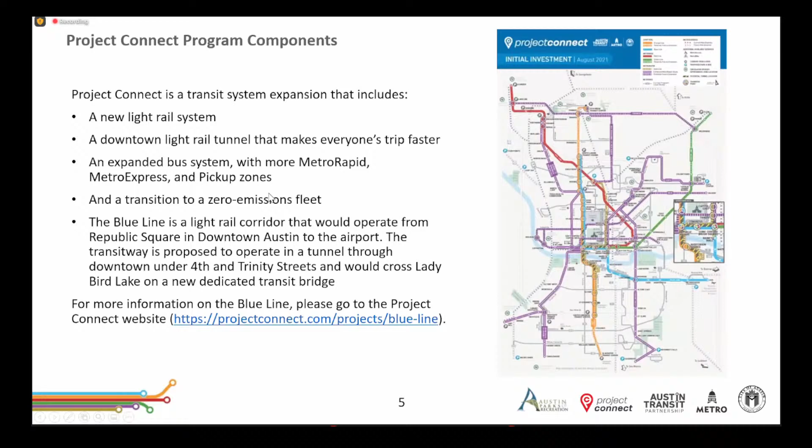Getting a little more granular, this is the blue line, one of the two light rail lines being proposed. The other is the orange line, which runs north-south. The blue line runs basically from the airport down the East Riverside corridor through East Austin, Southeast Austin, and then into the South Central waterfront area.

At the waterfront station, in the South Central waterfront area, it takes a right turn. This whole section of the blue line is at grade, running on the surface. There's a little bit at the airport that's elevated, but most of it runs on the ground in the center of Riverside Drive.

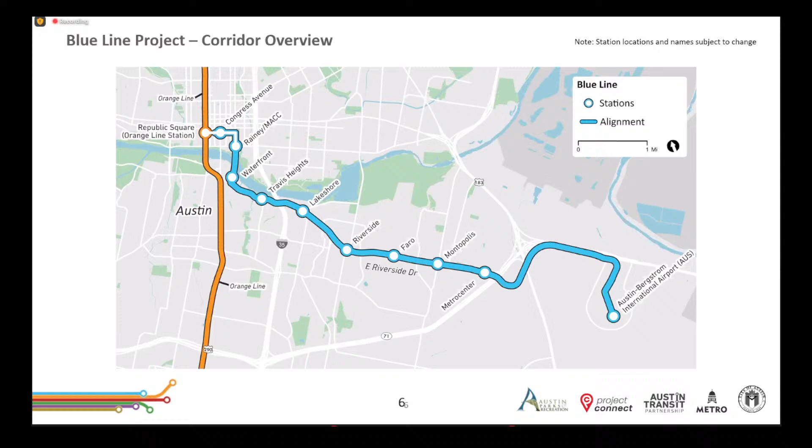When it gets to the South Central waterfront, it takes a right turn. There's one stop, and then it goes into a bridge over the lake. When it gets to the other side, it goes down into the tunnel. Then it joins at Republic Square with the orange line, and together the blue and orange essentially run north up Guadalupe and then eventually North Lamar. That's the context of the blue line, of which tonight's discussion is really a part.

This is a little more zoomed in, and you can see how the blue line, coming from the east down Riverside, takes a right turn at the South Central waterfront. There's an at-grade station, a surface station called Waterfront Station for now. All station names are subject to change as we move this process forward.

As it approaches the water, it rises up and over the lake. When it gets to the north side of the lake, there's what we call a portal, where the train dives down into the underground system. Basically north of the portal, it's all underground as part of the subway.

There is the Rainey Street station basically at Cesar Chavez, with a couple of entrances planned south of Cesar Chavez to provide easy access to the rail network. Then it continues north up Trinity Street, past the Convention Center, and at 4th Street takes a left turn and goes towards Republic Square.

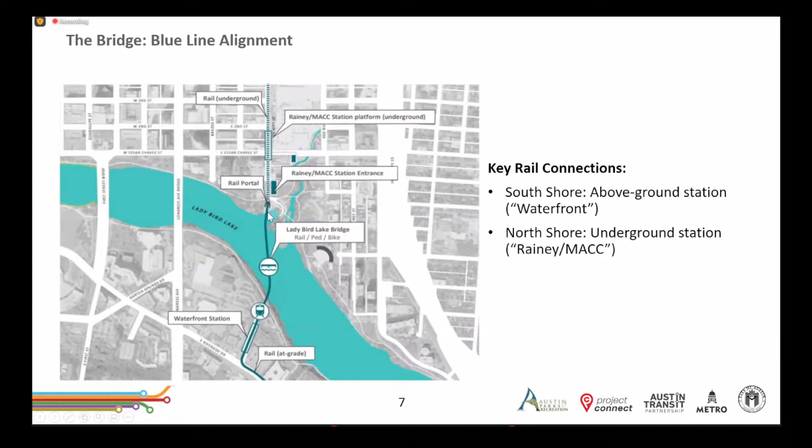This rail portal is a really key node in the whole alignment of the blue line. That portal is located almost exactly at the location of the Waller Creek Boathouse. That is really the basis for this conversation tonight, because there is a conflict there between this critical moment where the train goes into the underground system and the boathouse itself.

There are a lot of other elements in the vicinity as well that we are trying to weave through and make sure we're supporting and maintaining. In addition to the boathouse, there's the trailhead, the beginning of the Waterloo Greenway Trail, which runs along Waller Creek to the north, right at that same location.

There's also the outlet to the Waller Creek Flood Control Tunnel, which has a lot of critical ongoing operational requirements. That infrastructure basically removes the eastern side of downtown out of the floodplain, and there are operational requirements on an ongoing basis with that.

There's also the Butler Trail, the hike and bike trail on both sides of the lake, which is such an important and well-loved part of our community. So this is a very complicated area where a lot of different infrastructure elements of our city are coming together, of which the Waller Creek Boathouse is one.

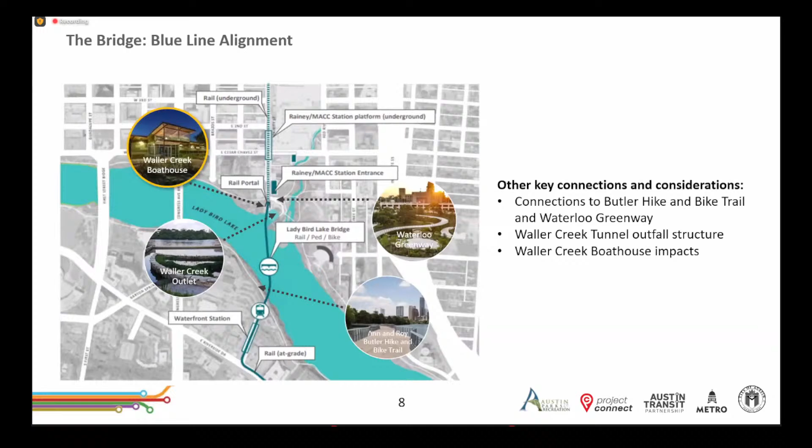In terms of where we are in the design and planning process, we are currently going through preliminary engineering and environmental review for the blue and orange lines. Last summer we released the 15% design, and we are now preparing the 30% design as well as the draft environmental impact statement.

As part of the preliminary engineering process, we have to document and identify all environmental impacts of the program, including physical impacts, historic resources, and environmental impacts, among others. So we're preparing that draft environmental impact statement, and the impact on the boathouse is one of the impacts we are analyzing and documenting as part of this process.

So the reason I point this out is that this discussion tonight is not going to be the last discussion we have. This is part of a process that will extend through the rest of the year in terms of analyzing impacts, documenting those impacts, et cetera. Then the idea is that we get through the environmental process by the end of the year.

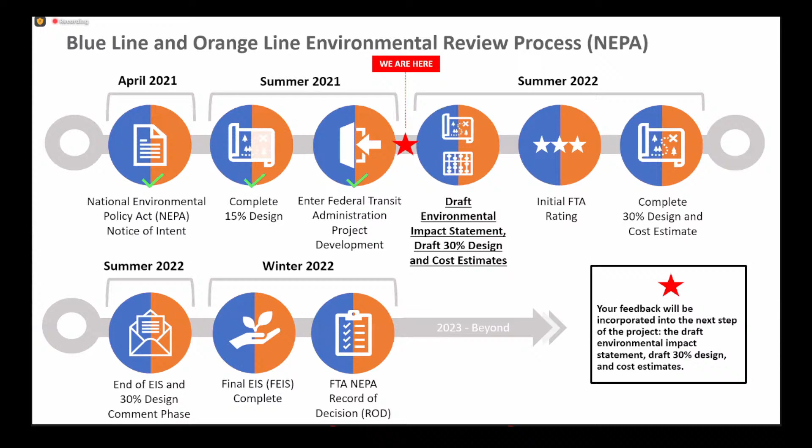So how does that relate specifically to impacts on the boathouse? This is a more specific flow chart to show how we're proceeding. The first thing we have to do is identify the impacts in association with the blue line. We've identified clearly that there is a potential impact with the boathouse just because of the intersection of the blue line with the current boathouse location. Those impacts are identified and analyzed in conjunction with our partners at PARD as well as at Texas Parks and Wildlife Department. Now, there's the boathouse itself, there's the surrounding and underlying park land itself, and there are issues related to both of those elements that we have to understand, analyze, and document.

So as we move forward, we will continue to assess what the impacts are, as well as what the mitigation will be to address those impacts. We can't just have the impacts and do nothing. We have to mitigate them. That's an ongoing process that we're working on now, and tonight's discussion is part of that. We're going to impact the boathouse. We have to mitigate those impacts.

As part of that mitigation for the boathouse, PARD has started to analyze potential alternative locations, alternative sites for boathouse facilities, if indeed it turns out that the boathouse will be impacted by this process. So tonight's event is really about gathering feedback and input from you all towards that analysis of alternative sites. It's a really important part of the process, and it'll all be documented.

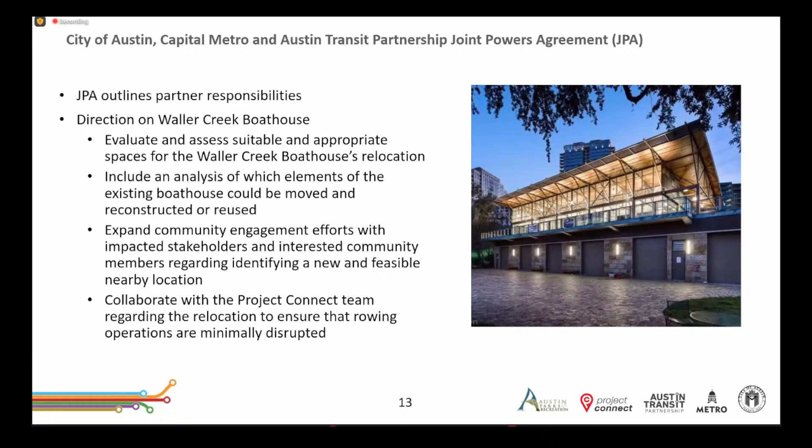So what I'd like to do is hand the rest of this presentation over to my esteemed colleague, Liana Calivoca, who will help walk you through the site analysis and some of the pros and cons of each of those locations. Thank you, Liana. Thanks, Kimberly.

So here we are today, starting this discussion in order to get your thoughts and feedback. As a first step in this evaluation of alternative sites, our planning team performed a preliminary analysis of parkland along Lady Bird Lake. The goal was to identify appropriate locations for a boathouse facility. Our planners started by identifying 6 sites that I will discuss next.

These sites were evaluated using a set of criteria listed here, including adequate land space. We want the site to accommodate a building of a certain square footage - at this time, we're thinking at least 7,000 square feet. We also want appropriate shoreline, meaning enough space along the waterfront to have docks and accommodate traffic in and out of the site.

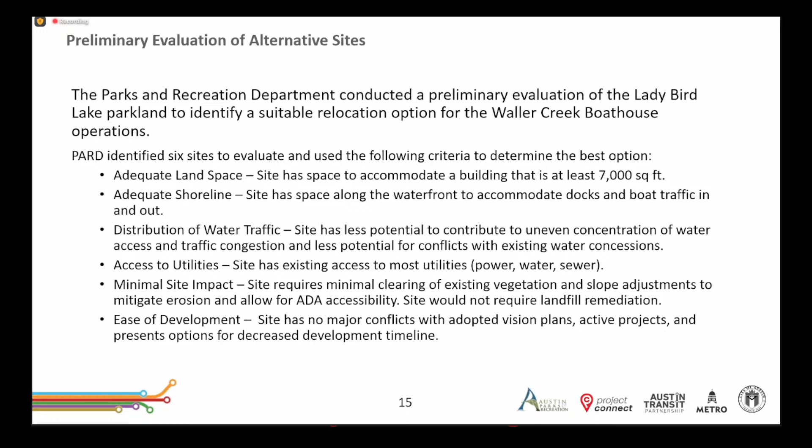So the next slide gives you an overview of the 6 sites that we included in this first analysis, and we'll walk through these sites together and discuss some of the characteristics we considered in this process.

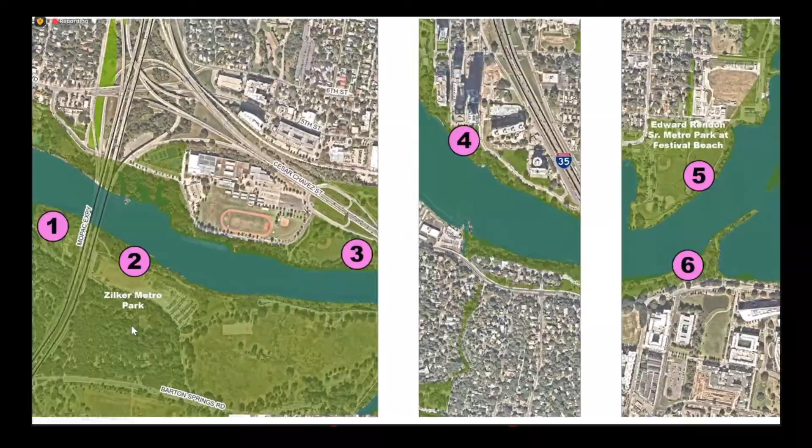Starting with the first site: it is located in Zilker Park, west of the Mopac Bridge and next to an existing rowing concession. This site is a former landfill, which means that remediation of the landfill would be required to accommodate a new building structure.

Parking and docks, we think, could be accommodated. However, selection of this site may be complicated because the Zilker vision plan is in process, so this will take a little more time to be finalized. In addition, the Mopac South project by CTRMA is in progress in this area as well.

The second site is also in Zilker Park, just east of the Mopac Bridge and across from the Texas Rowing Center, which is on the north side of the lake. Similar to the first site, it's also a former landfill with the same remediation requirements.

Again, it's within Zilker Park, where the vision planning process is unfolding, and the CTRMA project on Mopac South is also offering some complications. These are things we would like to be mindful of and consider as we move forward.

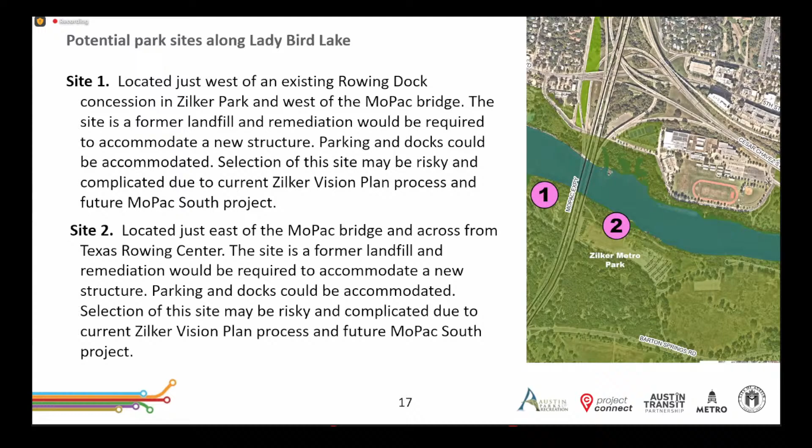For site 3, it is on the north side of Lady Bird Lake, a ball field on city parkland currently used by Austin High School through an agreement the city has with AISD. Relocation of a boathouse to this site would require the department to identify a replacement site for the ball field.

In addition, the site is adjacent to the Texas Rowing Center and right next to a popular boat launch used extensively by the public. The location is congested with many users from Austin High and the Butler Trail, which has resulted in limited parking availability.

Site 4 is further east and close to the location of the current boathouse. Considerations for this site include the upcoming project by the Trail Foundation, which is in permitting right now and is expected to bring improvements and amenities for children and families that are lacking in the Rainey Street and downtown area.

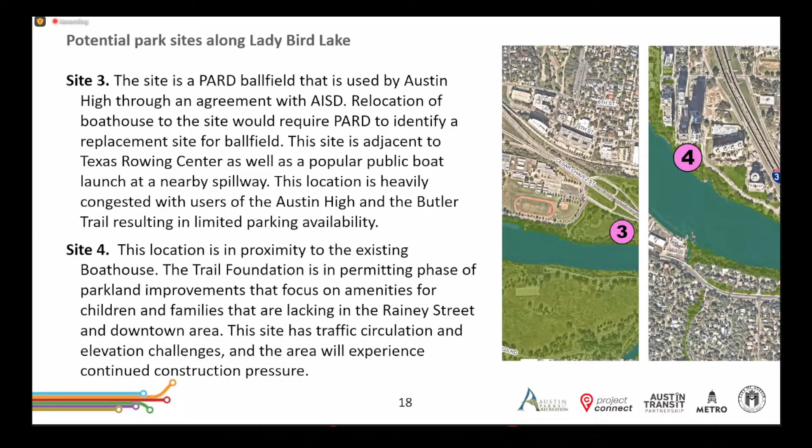Site 5 is located within the former Holly Power Plant and within the Holly Shores Edward Rendon Senior Park at Festival Beach.

This park has a vision plan that was adopted by City Council a few years ago, and that plan does not identify a boathouse facility in this location. Such a change would require community engagement and an amendment that will have to go through boards, commissions, and eventual council action. This process may complicate the timeline for the project, so that's why it's one of the considerations we want to bring up.

We also did a recent assessment of the warehouse buildings on this site, and we discovered that water and wastewater utilities are also lacking along this area of the waterfront.

We come to the last site, located east of I-35 on the south side of Lady Bird Lake. This site includes an existing building which housed a hostel that permanently closed a few years ago, so the building is vacant right now. It could be extensively renovated to accommodate a 7,000 square foot facility. It also has an existing canoe rental concession that could be expanded with the new facility.

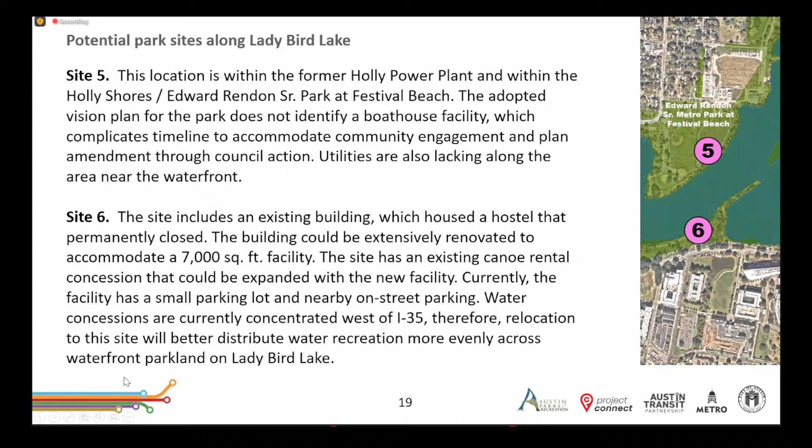With this, we come to our metrics on the next slide, which has our preliminary analysis for these six sites that were identified. At this time, the leading alternative site for a boathouse facility is site 6, the site where the former hostel was located.

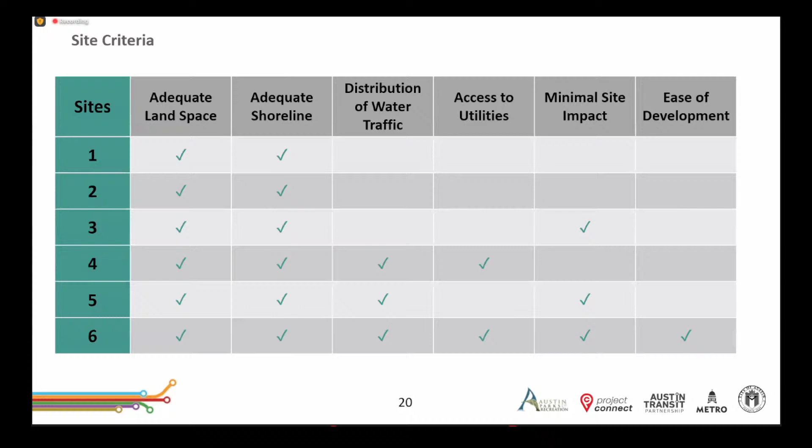So that concludes this very preliminary consideration of the alternatives for these sites that we evaluated, and I will return it to Jocelyn.